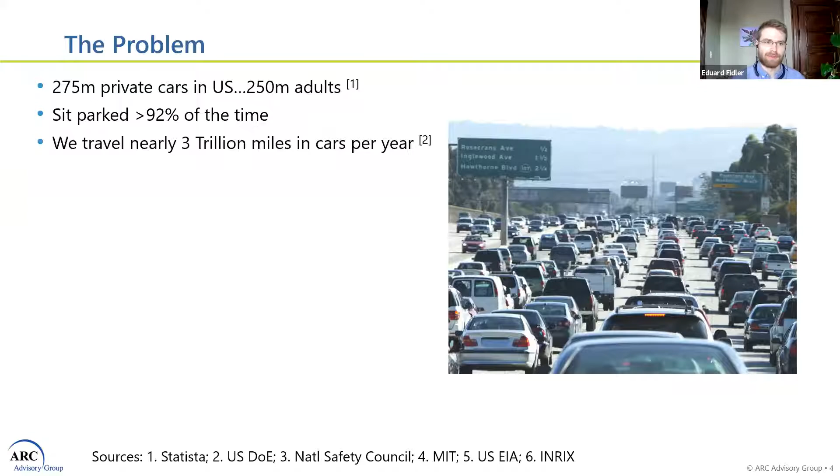We have 275 million private cars in the US, and only 250 million adults. They sit parked the overwhelming majority of the time. We travel about 3 trillion miles every year in those cars. Unfortunately, we see about 40,000 road deaths every year.

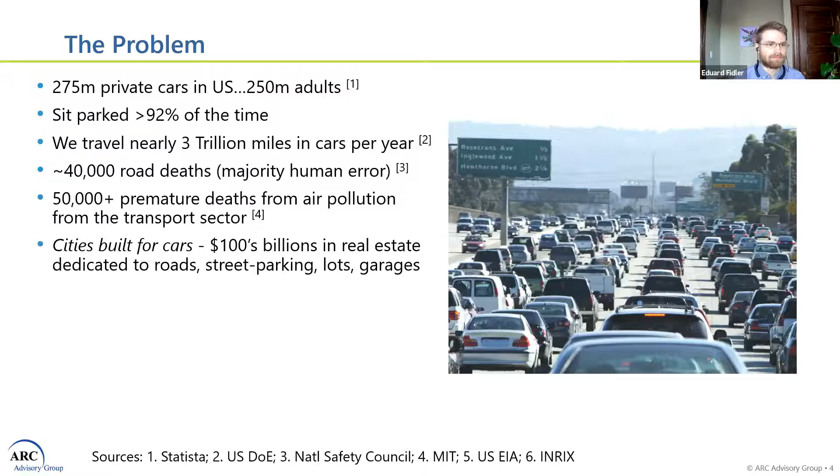The majority of that is attributed to human error. We have 50,000 premature deaths caused by air pollution just from the transport sector, not power gen, just transport every year. Our cities are basically built for cars. We have pretty much fortunes in real estate value dedicated just to roads, street parking, lots, and garages. Transport is, of course, the largest emitting sector of CO2 in the US.

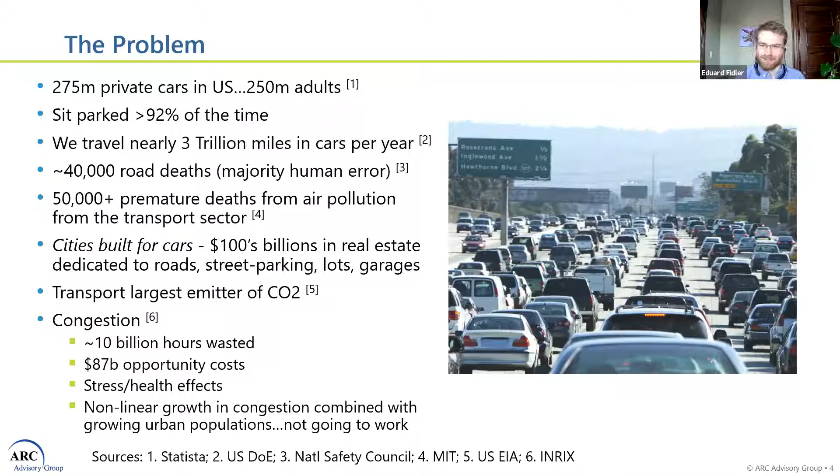And traffic congestion, we waste $87 billion in opportunity cost. We spend a lot of our time, stress, sitting in traffic, right? And this state of affairs is caused by distracted, error-prone human drivers, that's us, taking our private vehicles for almost every trip, all powered by fossil fuels, right?

So how might you address that? So what's emerging now and what we're seeing now is something that's been called the ACES transition, or the CASE transition. So ACES stands for autonomous, connected, electric, and shared.

So the idea is, can we reduce vehicle miles traveled and increase vehicle utilization by leveraging shared mobility and mobility as a service concepts? Could we make sure that the miles that are traveled are done cleaner, so powered by electric powertrains and clean energy?

And can we make those miles safer and have the vehicles piloted by machines? So that's autonomous vehicles, or humans that are augmented by connected vehicle technology. And of course, that's the subject of the session today.

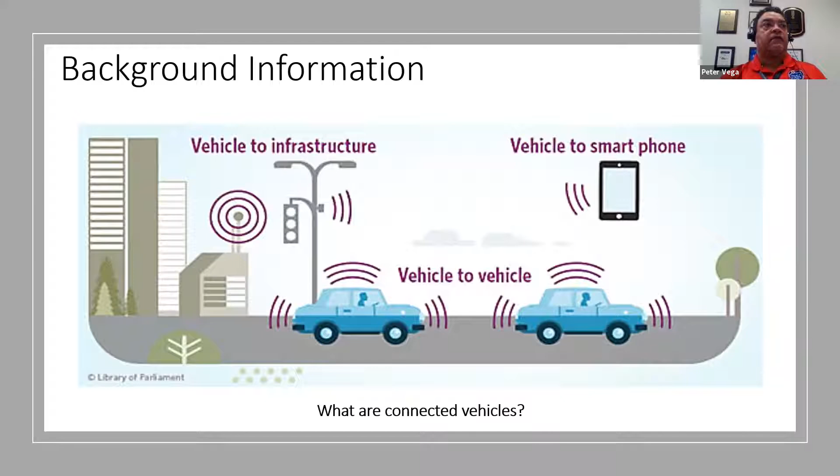For the vehicle to infrastructure, obviously for this project we put in devices on mast arms and within cabinets. We also purchased onboard units for testing. We used dedicated short range communication, DSRC, with background knowledge that 5G may come into play in the future.

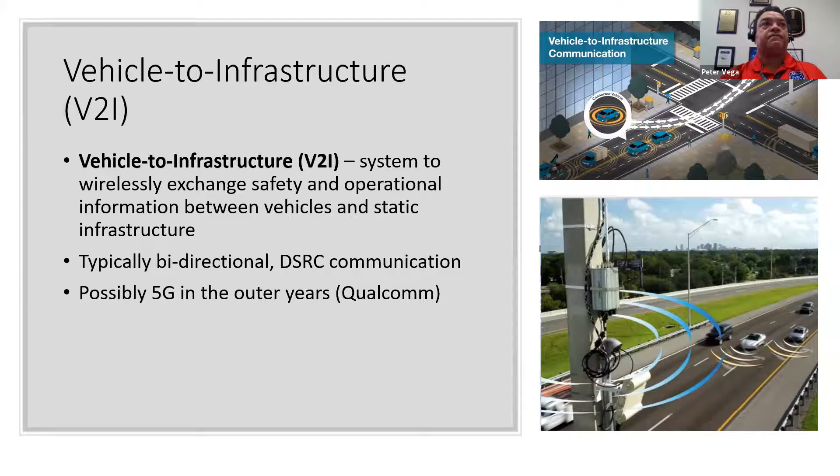So based on all of that, when I was first asked to take on this project and begrudgingly said no until my boss said yes, our minds basically went just like this, all these words, all these thoughts in our head. How do we deal with this? We've never done it before.

At the time, Florida had only done 2 connected vehicle projects. One was in Tallahassee, which was semi-successful, and one in Tampa, Florida, which is still ongoing, with the Hillsborough Expressway Authority. So there was not really anything to lean on except the basic knowledge they'd received, and also the knowledge from Michigan.

So we're talking about using DSRC, 75 megahertz radio spectrum. I'm not going to go into much detail on that because I'll be talking about it later. But it is dedicated to public safety and non-public safety. It's been that way since 1999, and was primarily safe for vehicle-to-vehicle and vehicle-to-infrastructure uses.

So if you haven't ever seen what's involved, it's pretty straightforward. You have several products. You have your onboard units - each vehicle needs to be equipped with one. Currently there aren't many to get great penetration out there on the roadways, but we purchased them on this project. We have our roadside units, placed at all the intersections we want to collect information from. And then we have our roadside equipment, which goes within the cabinet.

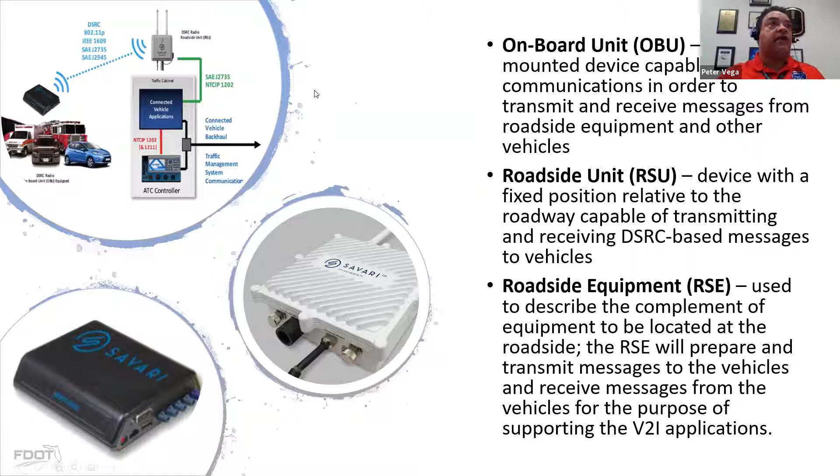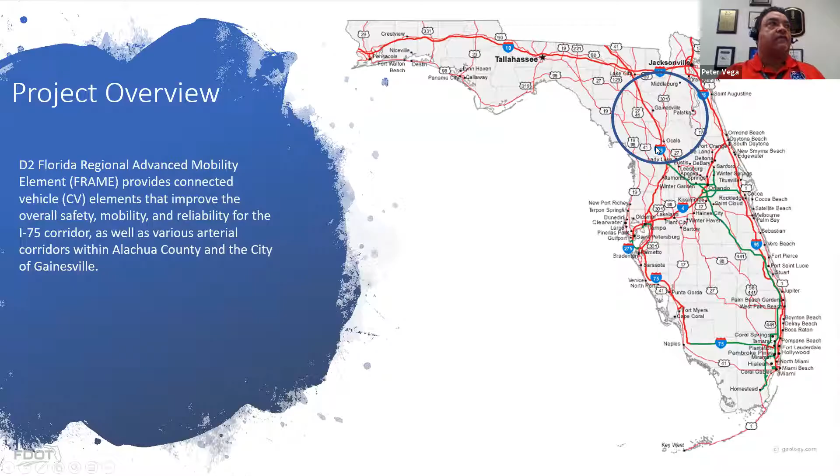Just another picture of Florida and what I'm focused in on. The project I'm going to talk about went up I-75 by Gainesville and throughout the city. If you're not familiar with Gainesville, Florida, we have several state roads that surround the campus. Just about every intersection we could touch, we put in a roadside unit, as well as about 30 miles of I-75 in Alachua County.

The basic project overview is we wanted to get the simple stuff, the SPAT, MAP, and TIM broadcasts, which have been done for the last several years. We wanted to get some basic safety messages incorporated. And then we wanted to try something that really had just been touched upon by the industry: emergency vehicle preemption and transit signal priority. There wasn't really a clear standard on that, so we wanted to see what was out there in the market. With the future, we did consider pedestrian type applications.

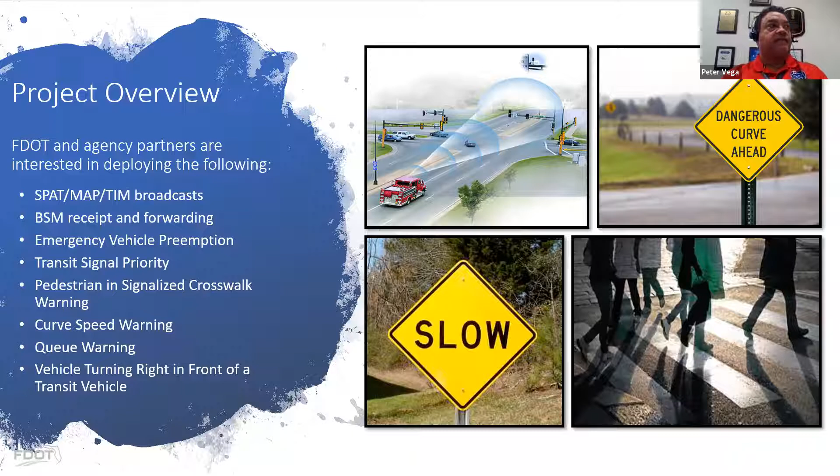We're still working on that. We have had some success, but from a DSRC perspective it's very difficult because you don't have any people on their bikes or walking with a huge radio to talk to the equipment. And then some of the other applications we're also going to look at.

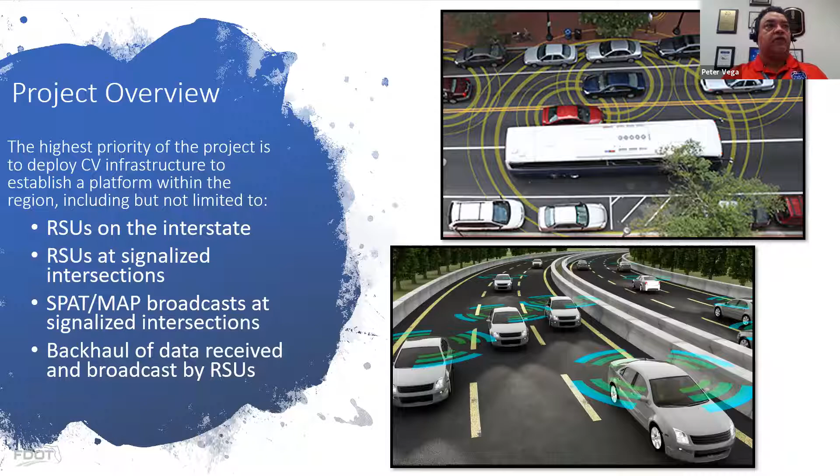So I mentioned RSUs on the interstate, RSUs at several signalized intersections. We got the SPAT and MAP done pretty quickly. And then what we do is we share that information with the onboard unit on vehicles that had it installed within our city. We also did some roadside equipment.

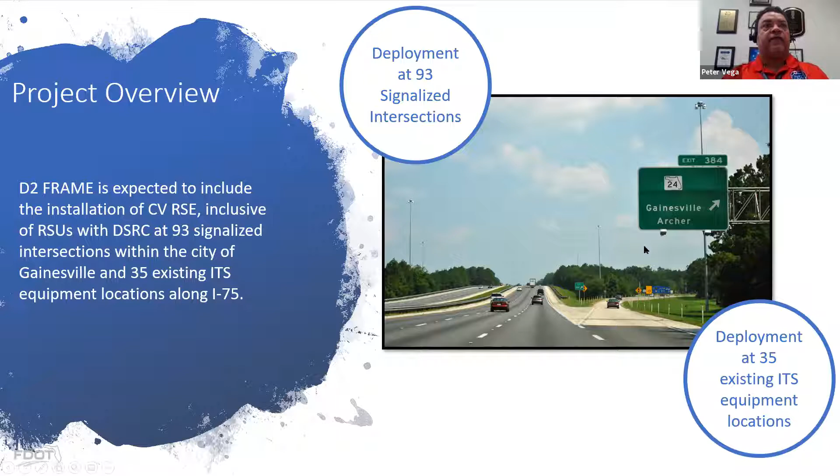So we initially entered this project with just one thought in mind, but then we decided, hey, let's try a non-DSRC type system in order to test one vendor against another and see what would be beneficial in the future. So we deployed 93 signalized intersections and 35 cabinets along the interstate, spanning about 30 miles.

The partners are the Florida Department of Transportation, in conjunction with the University of Florida, which have several research projects building off of this, the City of Gainesville, and then the public road users.

Let's talk about the selection. We had to decide which approach was best. We had the choice of design-bid-build, system manager, and RFP, and we decided to go with a system manager approach. We interviewed three firms, Atkins, Metric, and I believe HNTB, and from that, Atkins was chosen to lead our team as the system manager.

Some things with the system manager approach I'll talk about: it's basically an interview process where we partner with an engineering firm that walks us through selecting the equipment. They also perform the design on the project, and then finalize it by helping us with procurement of the equipment, testing, and validation.

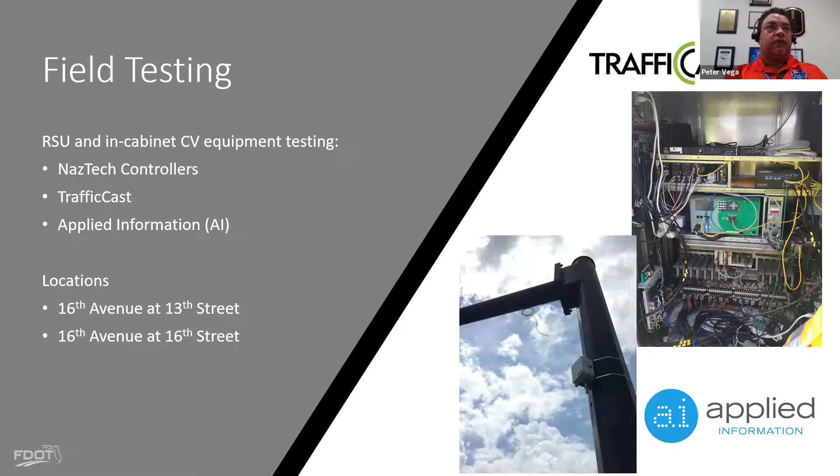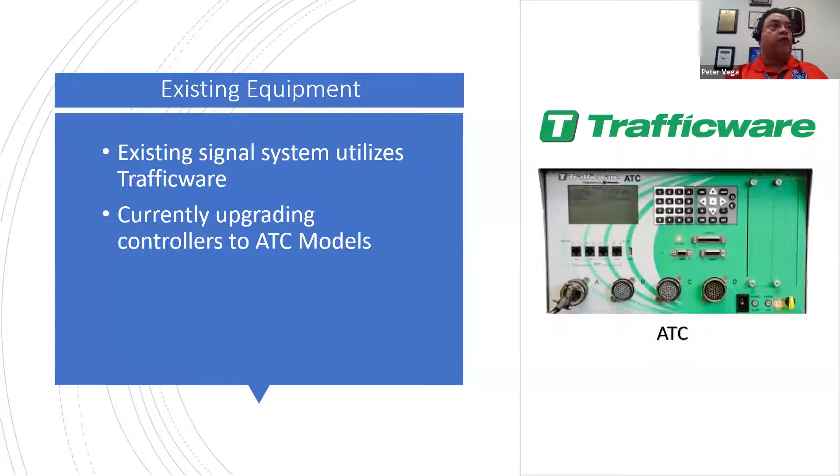From that, we took the winning vendors, Applied Information and TrafficCast, and put them out in field testing, to ensure that what worked in a lab environment would actually work in a real world environment. One criteria we required was that they work with our existing controllers, so we didn't have to take out 93 controllers and replace them with what worked with their product. We had Trafficware devices throughout the city, and it just meant updating the firmware on some of these locations to make it work.

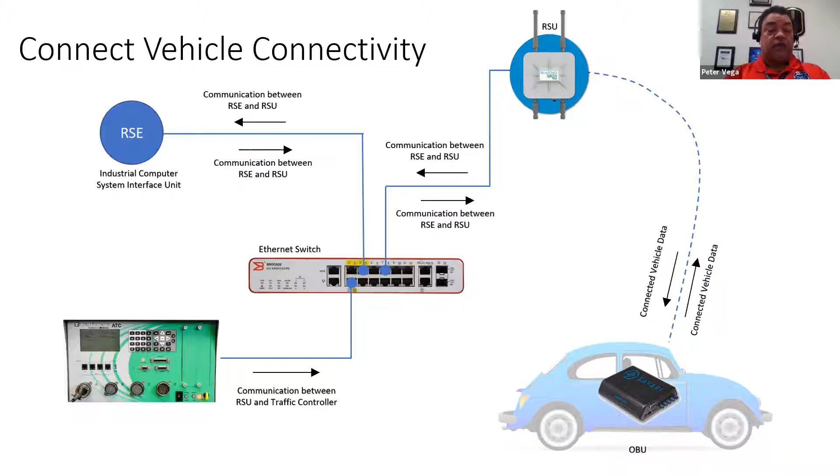Here's a straightforward picture of how it works. The controller ties into the switch, and everything else is connected to the switch, and through magic, it all comes into play. I should mention Savari is the onboard unit we utilized during this project, in conjunction with Denso.

With the system manager approach to equipment procurement, what the department learned is that we could determine which vendors best fit our needs. We would sole source them using the justification of testing, and we got some pretty good pricing out of the effort, probably saving ourselves about 20% versus going with a contractor design-bid-build type approach.

Once we picked the vendors, this was all done simultaneously as well, which shortened the project timeline. We were doing the design through Atkins, making sure we had all our pieces in place, coordinating with the vendors and making sure our infrastructure was capable of working with their product.

At the same time, simultaneously, we had to fill out all that laborious paperwork for the FCC. Hopefully none of them are on this session, but if they are, it's very labor intensive. We utilized our general engineering contract out of Tallahassee to fill out over 93, I think it was 120 forms, providing detailed info, lat-long, serial number of the product, all the minutia, which thank God we had consultants to help us with.

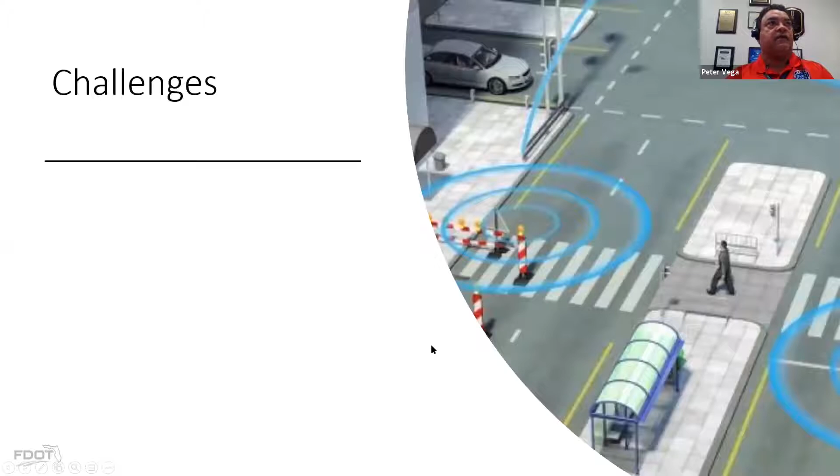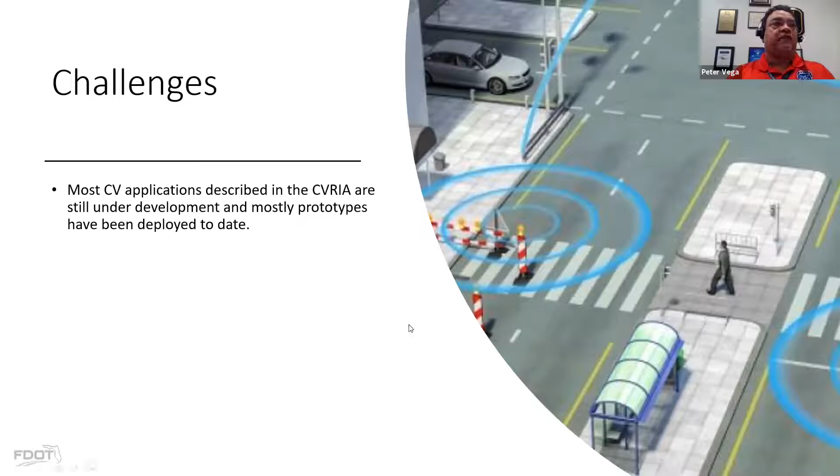Some of the challenges were: a lot of these applications are still under development through the standards, so again firmwares need to be upgraded several times to make it work between different vendors. There is low CV penetration out there, so from my standpoint, I tell our leadership that we will not be CV ready for years through this process. And that's where the phone application came into play.

Both vendors do provide the capability of using the cloud to get the information to the motorists. The benefit is it will also reach the pedestrian through a phone app. The key concern was latency, but we haven't witnessed that - latency is less than a second within the city limits. Obviously in Florida, the more rural you go, the less likely you're going to have that same speed.

Drivers are unaware of connected vehicle technology, so it's going to be the vehicle manufacturers that push the market, and as it becomes a standard in vehicles, motorists will become more acclimated with the features. And then there's limited support for CV operations in legacy signal controllers. Fortunately, all of the controllers were ATC ready to handle connected vehicles, but we do have some parts of our district where it's going to be changing everything out in the cabinet in order to make it work.

So with CV evolution, I'm going to touch a little bit upon this - we have 5G technology. That was kind of a curveball because it came in just as we'd already made the purchase, and then we got the notification about 5G. So we've talked about C-V2X and what we're going to do. We ended up, not buying yet, but we've been examining and researching and are about to buy an edge device or smart box.

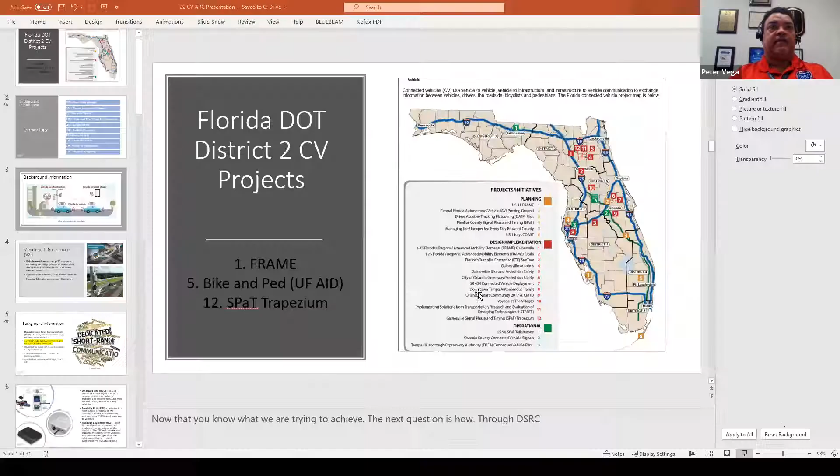So it's kind of a wait and see. We had the money, we were about to do it immediately, and then we decided to hold off until the new administration gives us clear direction. So once the FCC chairwoman and US DOT give us the path we're supposed to go in, we'll put the project back in gear.

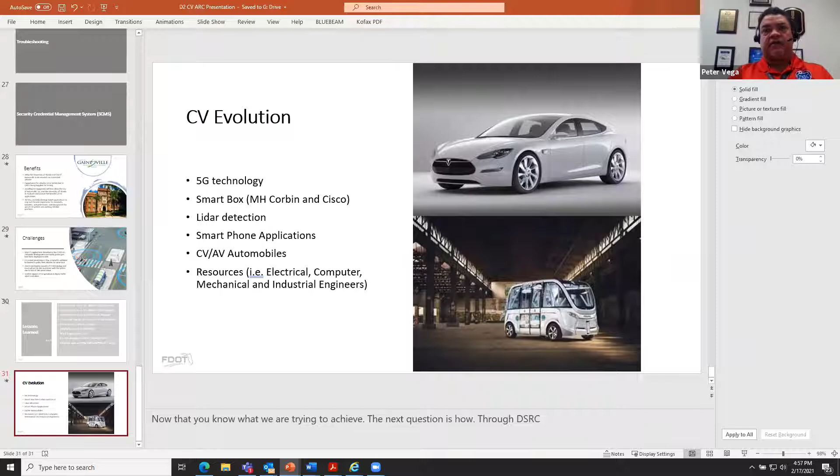We're still doing the operational stuff. We're doing the data collection. And it's just a matter of what type of communication system should we use, DSRC versus C-V2X. And with that, I'll take questions at the end.

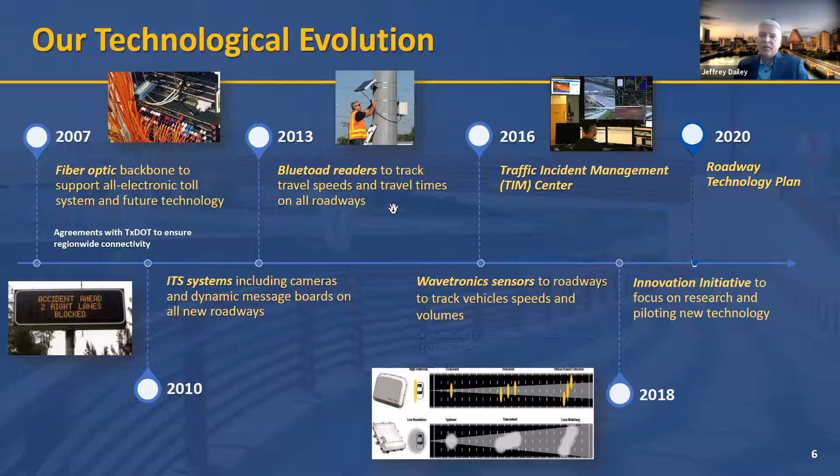So we want to have a test bed to advance both tolling and mobility technology, as far as safety and traveler information, and then advancing regional collaboration.

We mentioned we have a traffic management center - Austin has one, TxDOT has one, our bus system has one, and they're starting to be virtually linked, but we're really moving the region toward a more regional effort to get us all connected in a regional traffic management center. That's something we think is important for the future, sharing our cameras. I mean, it seems basic, and I know that Florida is very advanced in that regard, but a lot of areas in the country are not. So this is an area where, as agencies, we all need to do better and put in a lot of investment. Everybody's talking technology, but there's not a lot of resources put in there to back that up. So we're starting to ramp that part of the program up.

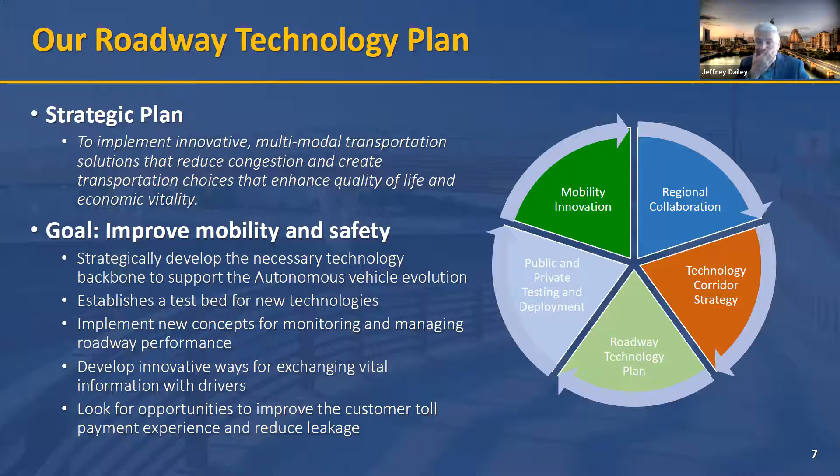A couple of pieces that we've already put in place - again, the sharing - we're going with a unified Lone Star traffic management system. We've moved toward that.

That's a similar system to what Florida has, based on what Savari produces and supports. But now we've contracted with a company called WayCare, and it's basically software as a service, and it takes vehicle information from HERE or WeJo and other services. So you've got a lot of connected vehicle information available out there, and it develops an algorithm that we meld with the information from our roadways and this connected vehicle information, so then we can predict incidents and use it not only for predicting incidents, but also to help us communicate out to the public.

That piece of communicating out to the public is going to be key to our goals over the next several years. We've put a number of roadside units out on our roadways. We've done dual band so we can take advantage of either DSRC or the CV2X 5G, and wrong-way driving systems. So the immediate term focus is to try to deliver immediate safety benefits for clearing accidents, detecting accidents, keeping the roads open as quickly as possible.

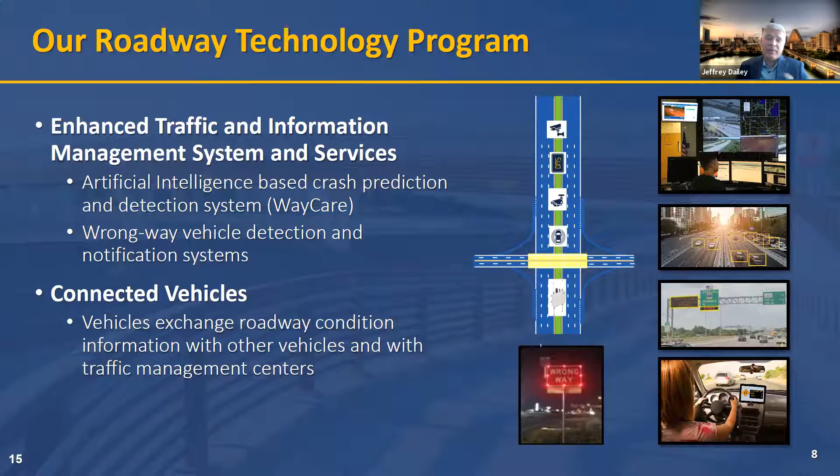And then the next phase is, how do we communicate information to the drivers so it can be more location specific. And that's where this CV2X, and even a potential app for people that don't have the newer vehicles, comes into play.

Leading into the tolling discussion, next generation tolling. So the next step, as I mentioned, is AVI, automated vehicle identification. That's your tags that you have in your car. And then you have your pay-by-mail, license plate based tolling. That's becoming mainstream with the license plate based tolling.

But that part of it is high risk. As you can see here in Central Texas, we get about in our high 60s percent of people using the tags. So that's pretty reliable. That's tied to a credit card account, we get paid, and the risk is low there.

The other part of it, the other 30%, is high risk. It takes a while to track down. You've got to send bills and not all of them pay. In fact, you'd be surprised, it's probably about 50%, and that's what you'll find at most agencies. But still, at the cost benefit over having toll collectors and the impacts on traffic flow, it still far outweighs having that situation of yesteryear.

So we need to find something better. The other thing we see out of this is GPS-based tolling, or some other version of that, will help us lower infrastructure costs. You're not going to have all these gantries and loop detectors and cameras ultimately. Having the toll collection tied to the system of the vehicle is going to be superior to what we have right now. Improved accuracy, efficiency, lower collection costs, just the enforcement of that. The vehicle, the identifier, and the charge is tied to the vehicle. Plus, it can expand a range of payment options and features for the customers.

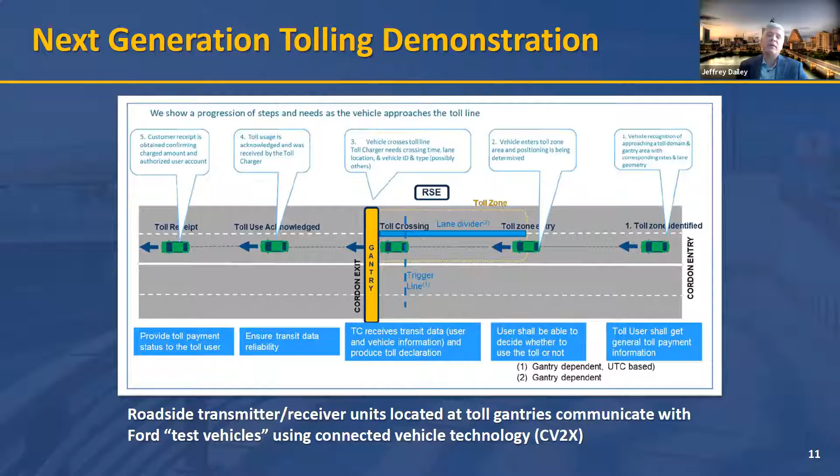So the CV2X technology, using HERE, WeJo, and WayCare, we're going to see that as instrumental in helping us communicate better with our customers. Speed information, roadside sign information - you can get it reported right into your vehicle. You don't have to wait 2 miles when you come up upon a dynamic message sign. You can get that right in your vehicle.

So overall, again, I think the benefits are going to be even greater when it comes to the roadway technology type things, the dynamic message signs. We were looking to put on our express lane about a $10 million investment to put additional dynamic message signs out there to give people more frequent information.

We went out and did a user survey, did some panels, and they said, believe it or not, we don't really trust what's on those things. We look at our phones. We make a decision when we get in there before we leave our trip. And really those dynamic message signs are only a confirmation of whether or not we're going to make that final decision, but they rely on our phones. So then we said, hey, let's step back from making that $10 million investment and put it into the new technology instead. And that's really our focus.

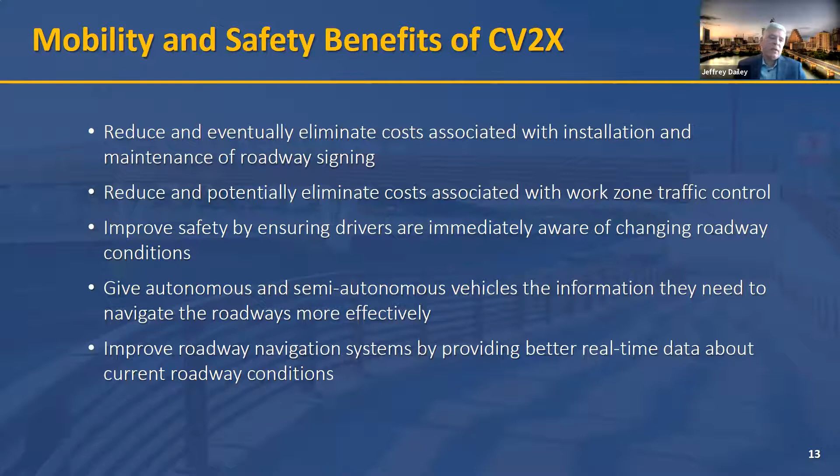Ultimately, and unfortunately, this may be blocking that upper screen there.

But anyway, we're headed toward a road user charge, and it could be 10, 15 years from now, maybe sooner. California, Oregon, Wyoming, Nevada are already talking about it, and other states are considering pilot programs. I think it's going to be here before we know it, especially with the electrification of vehicles. That's going to open up a whole range of options and capabilities. Rather than the back office being individual toll agencies, you might see a back office for the state, or maybe tolling as a service. This could go a lot of different ways.

There's a lot of unknowns out there. What we're trying to do is stick with the basic foundation, infrastructure, communications, the power, put the right infrastructure in, and partner with the private sector to help answer all these questions.

And that pretty much concludes my presentation. I think Brennan, I don't know if this is the right time to play your video, but that's a pretty good show you've got to display how the system will work. Hey Jeff, I could do that.